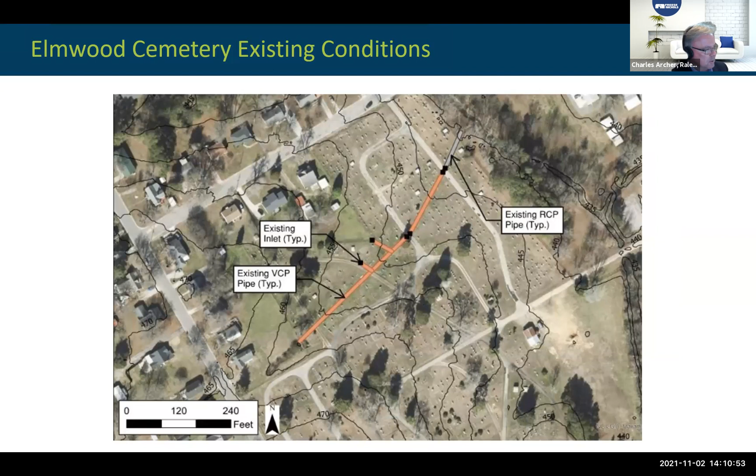And for all of these alternatives, as we go through, we looked at slip lining as well as trenched repair. Just a brief overview, and I've got a little video later on that'll describe slip lining a bit better. But basically, slip lining is pulling one pipe through the existing pipe to reline it, and ultimately using that slip line pipe in place of the existing.

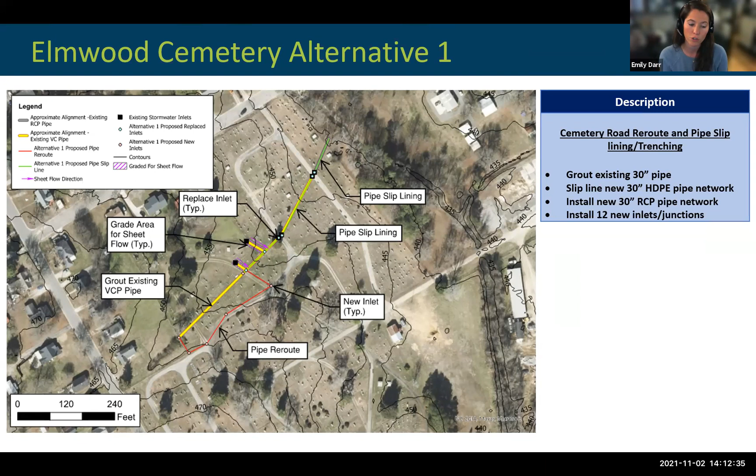And then trench repair is kind of your traditional dig up, remove, and replace type of repair. So each alternative looked at these, and we'll have the numbers towards the end for the different risk associated with slip lining versus trench repair for each alternative. So Charles, if you want to go to the next slide.

So alternative 2 is repairing and replacing the existing alignment. So as the pipe currently falls within the cemetery, this would involve the slip lining or trench repair of the full extent of the pipe.

We would replace the 7 inlets that are currently out there. For those of you who've been out to the cemetery, you know the inlets located kind of in the center of the alignment. The road's kind of beat up and starting to fall apart a little bit there, so while we're in there doing work, go ahead and replace those inlets.

The next alternative we looked at was a complete reroute of flow outside of the cemetery. This alternative addresses the situation of having flow through the cemetery, although you now have to deal with a lot more utility coordination along your right of way.

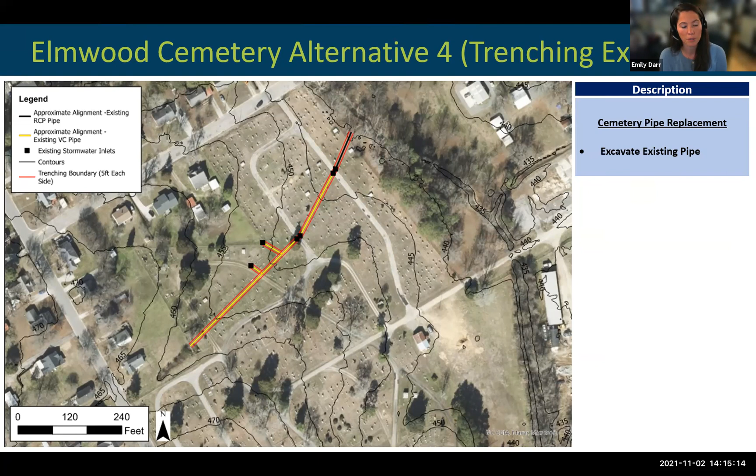As Charles mentioned, the existing pipe was only placed within a 6-foot walkway, so to speak. So very small equipment would need to be used, if any equipment at all, to access this alignment without disturbing the graves. That brings us to how we analyzed the different alternatives.

First and foremost, we considered the risk to the graves. We know this is a very sensitive subject, especially for people who have family members within the cemetery. We also considered the cost. Given those two factors, we looked at the different grave sites and the proximity to the replacement.

We quantified the number of graves within 5 feet on either side and within 10 feet on either side of the proposed alignment. Those are quantified in the second and third columns of this table, and at the end of the table you can see the cost estimates for each.

From a quick comparison, alternative 2 was the cheapest and the least risky, so the fact that those line up is a good thing. Moving forward with the project, we would recommend alternative 2, which, as a reminder, was the replacement of the existing alignment with a slip line alternative.

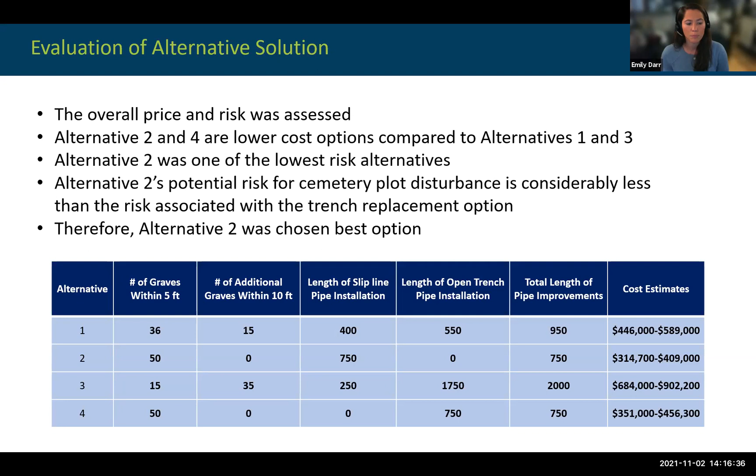So I think on the next slide we show a little video of what that slip lining is. Charles, if you want to play that, it's a short video.

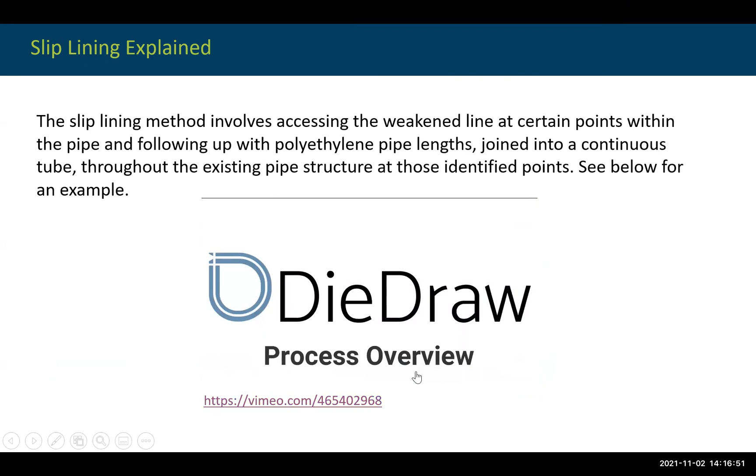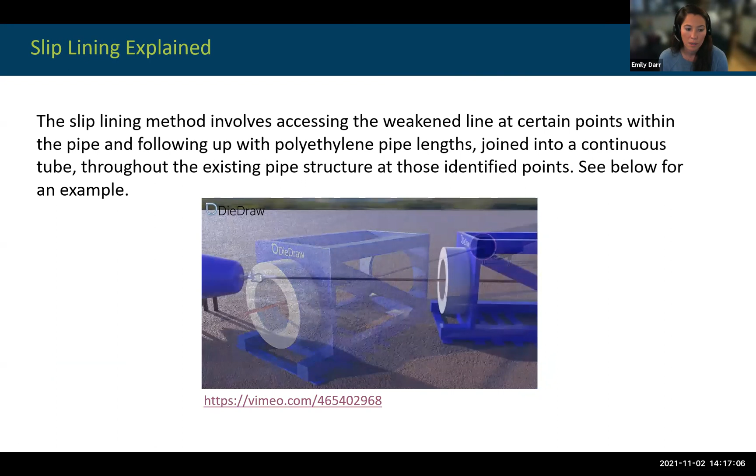The contractor will basically set up this system. He'll pull this HDPE pipe through the existing pipe. What it's going through right now sets the diameter of the pipe to be just smaller than the existing pipe so that it fits through the existing system.

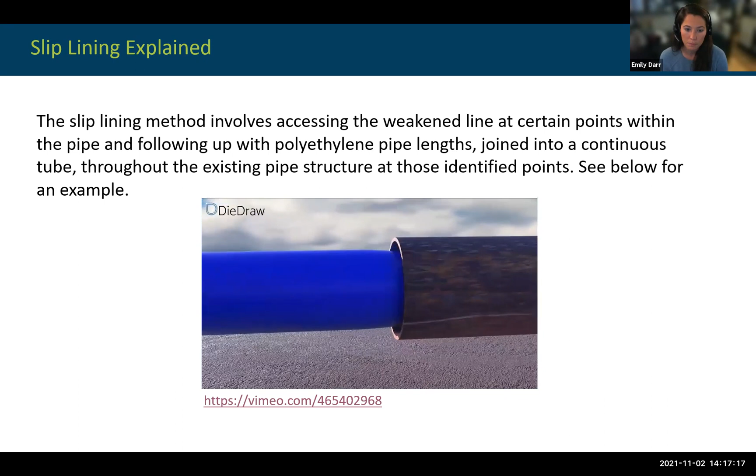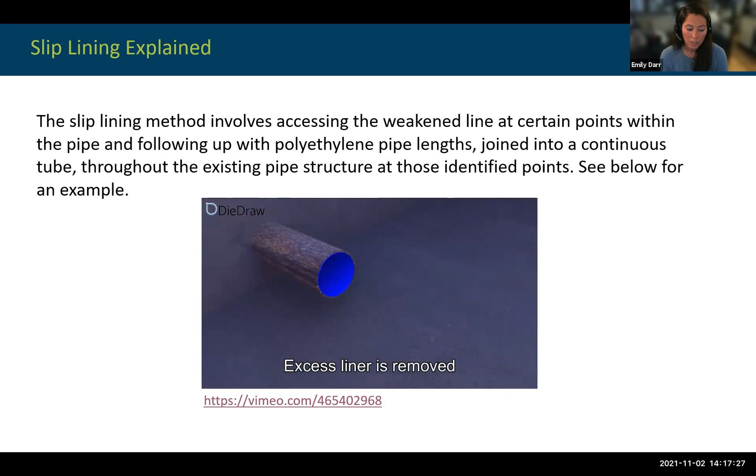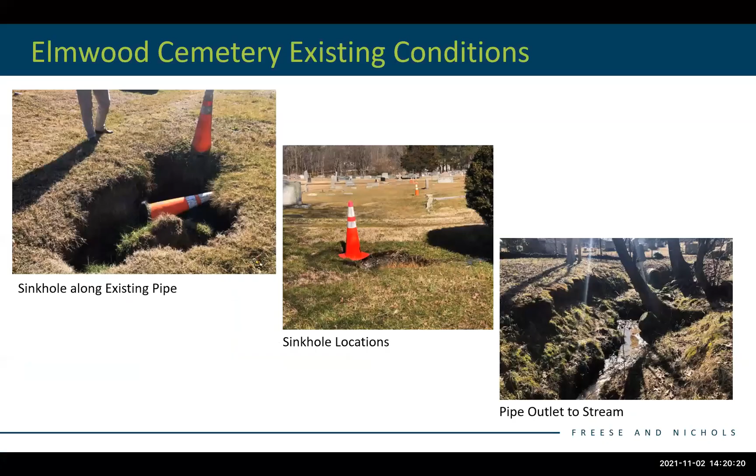Ellie, can you please explain for us, and it may be that I'm the only one that missed this, your description of inserting the slip lining and running it through, how that works with existing pipe, even if it's damaged, but what if the pipe is completely collapsed, so it has to be removed? What happens in those sections?

From my understanding, the slip lining contractor will set up a base, kind of an insertion point, and then he'll have another staging area downstream, and he'll pull that pipe through. He has said that even if it's collapsed completely, he's still able to pull the pipe and basically just move those pieces out of the way. So it would reform, from either end of the pipe that it's going through. It may just not go through broken clay pipe in those instances. Does that make sense? So it'll use either end of the pipe that's in place to kind of fill the void of the pipe that's failed.

Right, and they'll just kind of set up. What the video showed is that the pipe goes through and then it expands and it's contained by the existing pipe. So I'm just wondering, how does it retain the same diameter if it doesn't have any type of wall circumscribing the perimeter? What makes it stay the same diameter as the pipe that no longer exists?

Right, well it will only expand so much, so you won't have like a big balloon in an area where you're missing pipe. Now it may be slightly larger. So I think the existing pipe is 30 inches, so it might be slightly larger in diameter than 30 inches, but you're not going to see a full pipe size difference between those areas. It'll expand a little bit more outside of where it's contained, but it won't be so much that it causes issues.

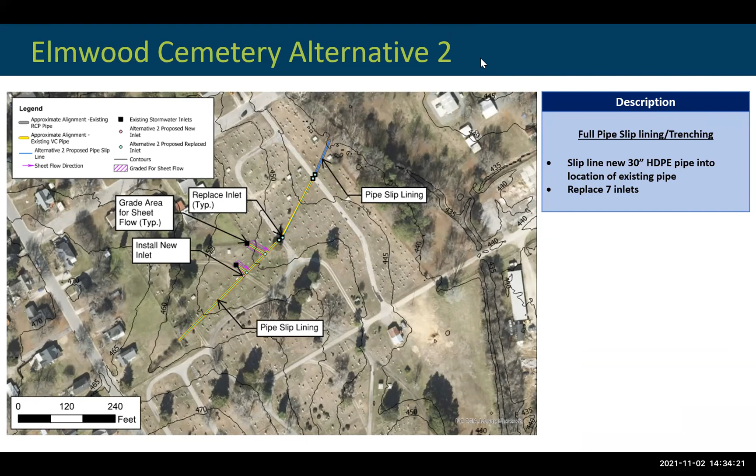So do we proceed on this recommendation to the full board, alternative two? I think at this point, the recommendation would be to move forward with the design. Whether we want to do construction at this point, but we could complete the design of the project. And then at the completion of the design, they can look at the market again with construction and see what kind.

Something strange going on up there. Oh, I do, don't I? Halloween.

So we could look at, after design, what would the construction be, and see whether this is something we want to try to do a budget amendment for this year or add it to the budget. And I don't have construction next year.

So the design right now is estimated at 13,000. Well, the design's gonna obviously include some of the other components. You have to do the survey in order to do the design, and you're gonna have to do your subsurface location. Most of this would need to be from your 13,000 on your chart down to the 8,000 environmental permit cost. The mobilization would be during construction, obviously, and material cost of construction.

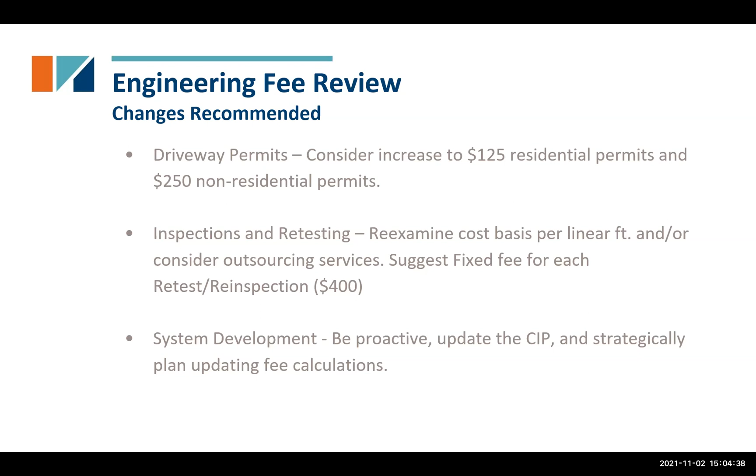So in similar fashion, we looked at the planning and zoning fees. These are some very broad categories. If you go to the table we prepared with the benchmark communities, they all have very different development ordinances and structures, with different terminology and different ways to establish many of these, and of course Board of Adjustment and sign fees.

You see these down at the bottom. Pretty standard stock and trade, but when it comes to permits, the way they differentiate between residential and non-residential, particular areas, zoning requests, conditional zoning, historic district zoning — every community is very different. We did the best we could to find similarities in those fees with yours, inclusive of the adjacent counties.

Permits, residential and non-residential, are all in the same range. Most of this is tradesmen-based, built on the cost for electrical work and plumbing work. You have basic charges for permits where you're trying to recover your cost and make it possible for additions, renovations, and similar work to move forward. We found those fees were pretty comparable across the board, because there are a lot of professionals in the building inspection business, with national standards and state peer-reviewed comparisons that keep those pretty comparable.

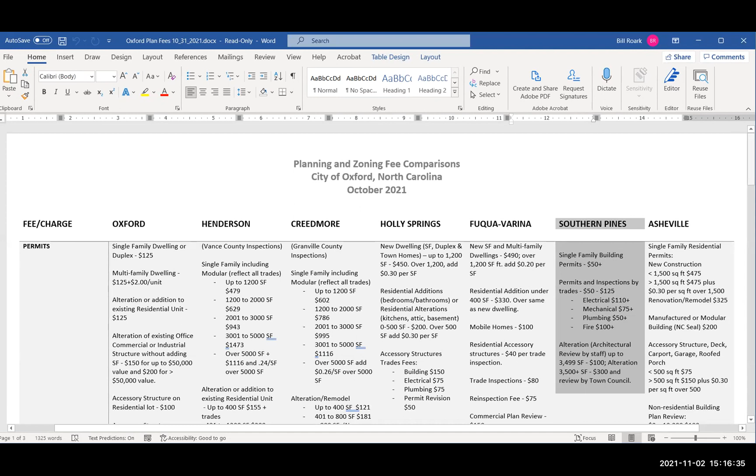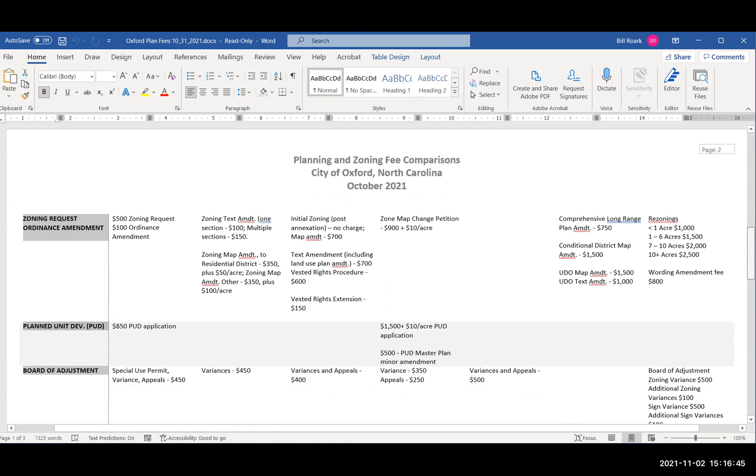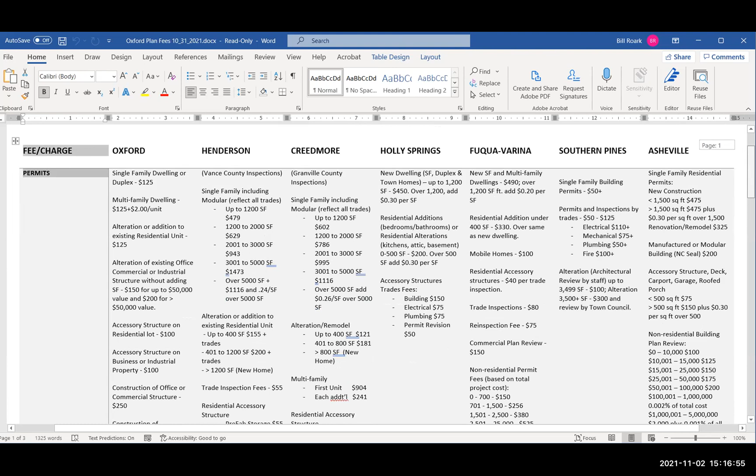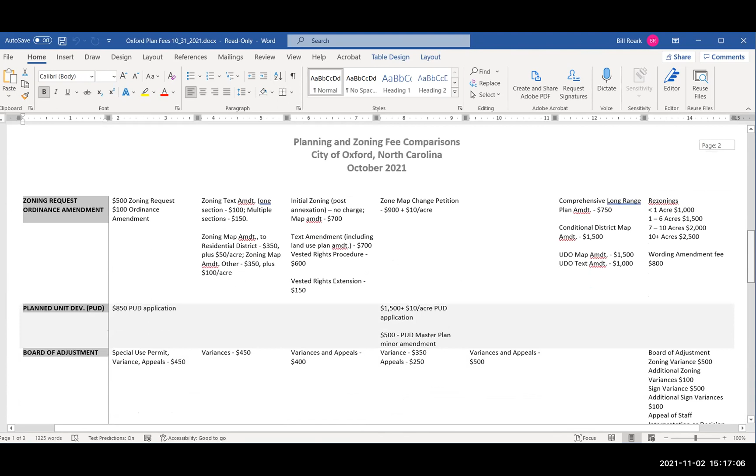So it's all those benchmark communities along with Oxford. We did this for the planning and zoning, and then we did also for the engineering. So we tried to distill all this down into that PowerPoint presentation to not overwhelm you with stacks and stacks of numbers. So these are all the fee comparisons? Yes. Okay, we were gonna give you the PowerPoint where we kind of distilled it down, but just wanted you to know that we didn't just pull those numbers out of thin air.

They did an extensive check and background on recommendations. I think everybody gathers the fact that what we're trying to do is not have the city's fund balance grow through these fees. What we're trying to do is hold our citizens harmless, essentially, in not having them pay the cost of developers coming in and needing all of the time with our staff, all of the resources, all of the attention. The fees that they pay should cover that. That is really the intent behind looking at this, to see if we are where we should be, or going where we need to go.

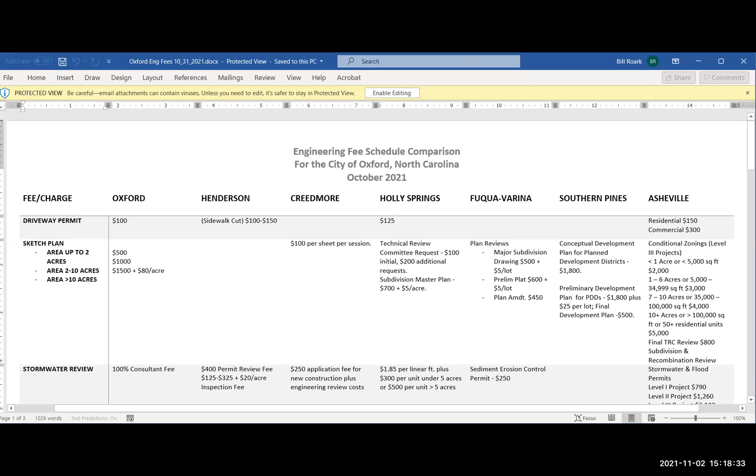And in some places we are not. And that's a byproduct of what they described previously, that we have had very little to slow growth for decades. Now it is on our doorstep. And all of this is growing pains, like we've been talking about for the last couple of years. And it's not new to the developers. It is new to us.

And you know darn good and well that there's a reason why the developers are here. They're here because there is an opportunity. An opportunity represents money for them. And we just want to make sure that it's not costing money to the city and the city's taxpaying residents. That's the real initiative behind this. It is not an effort to make money or have the city's coffers in any way, shape, or form.

We just make sure that our citizens don't pay the bill, and that in turn, when the developer submits these plans and their inspections and all these things that are required, that they're also being done in a timely fashion. That the developer expects, as well as a certain level of professionalism that is being performed during those inspections and reviews, so that not only does the developer get what they want because time is money for them, but the city gets what it wants and needs to make sure that the product produced is of the highest quality possible, meeting all the plans, specifications, and the engineering design that is there.

Because if you'd like to come up to my office, or if you'd like to go to Amy's office and pull out one of these plans, you'll see the level of detail in it. All of that has to be made sure to make it absolutely correct, because if you mess that up, you've got what has been prescribed before, as going back in and having to replace water lines. It's a nightmare. So you need to do everything you can to try to get it right on the front end. And with that front end comes cost, comes expectations, and it shouldn't come free. So that's just the bottom line in all of it.

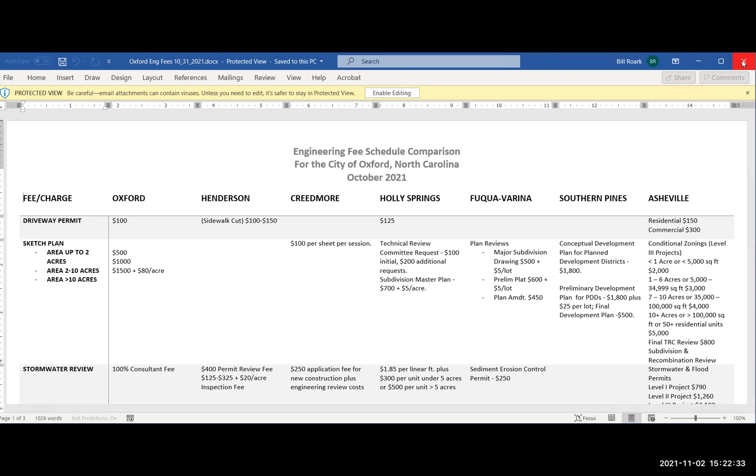You said we will be practical. Yes, yes. All right, what else do we need to talk about on this? I think right now we've discussed it enough. We really wanted to plant that seed in your minds and get your reaction, whatever that may be, to that conversation about fees, and to get you to hopefully understand where we are coming from and what we are doing when we propose something like this as far as a look back at our fees.

Nobody wants to pay more, but the developers are getting something out of this. The city hopes to in the long run, and the investment on the front end is critical, or you're going to pay dearly on the back end of it. We're starting to see some of that now, with some of the developments that came earlier and the condition of the roads and other things we're dealing with. Not saying anything was done inappropriately, but you want to do everything you can on that front end to make sure you're getting the highest quality product you can possibly get.

We may make a recommendation for the board at the December meeting for some of those fees that they indicated there were changes recommended. So we'll distill that down from everything they looked at, and those few items they did recommend changes for, we'd like to send into the December board.

For what it's worth, as retired city manager, I concur entirely. I would add to the comment I made earlier, this is a valuable process for you to review these fees and charges, because it's not just a financial thing, it's a regulatory thing, it's a quality-of-community thing. Whether you raise a single fee or not, having gone through this, be knowledgeable of where your fees are in the marketplace for your position.

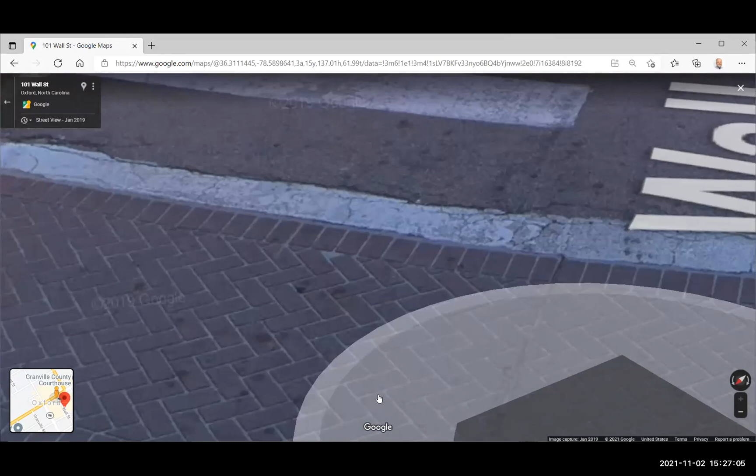We want to give crosswalks something other than the typical solid white stripes, which is the high visibility standard. Going ahead and providing something a little more aesthetically pleasing - by Wall Street you can see it looks like brick, it's colored, it's something different than your ordinary crosswalk. At the roundabout, there's a white stripe on either side, and in the middle we have the crosswalk look of brick.

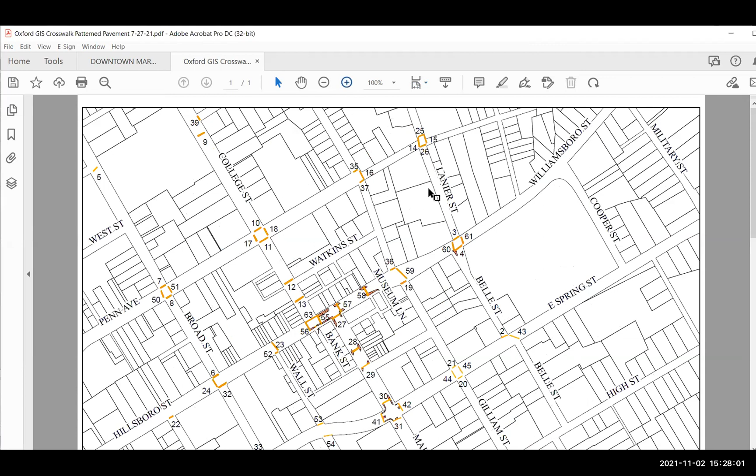So we identified the locations in the downtown area, reached out to the company that did this work previously, and put together a map that said, okay, if we want to achieve this look in the majority of the downtown area, these are the locations we can move forward with. You may have noticed DOT is out putting in handicap ramps downtown and moving forward with some of these things. I expect you can read this, but we can also make this map available showing all the locations where we'd put crosswalks and how they exist currently.

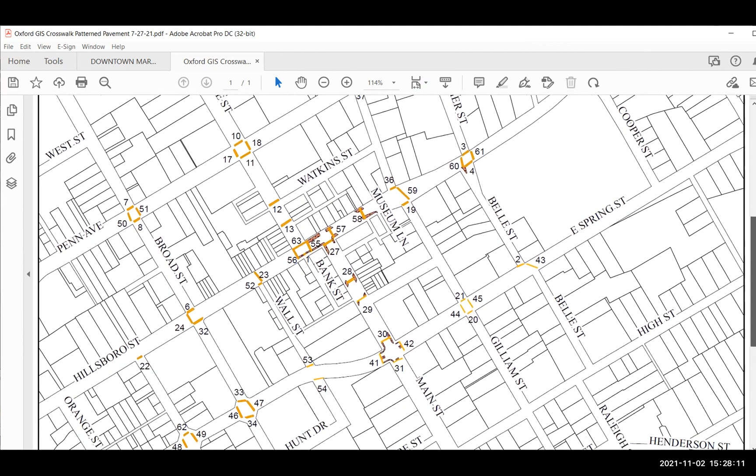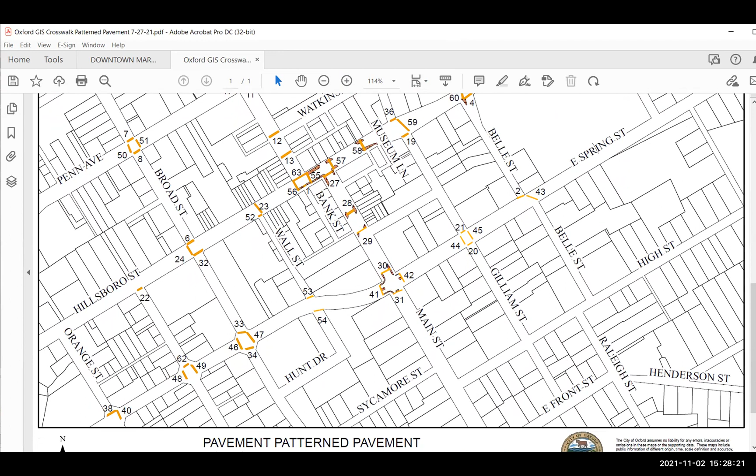We looked at the pricing of those particular locations and found that if we wanted to do all the crosswalks shown here, in the municipal service area, it would cost us somewhere in the neighborhood of $250,000.

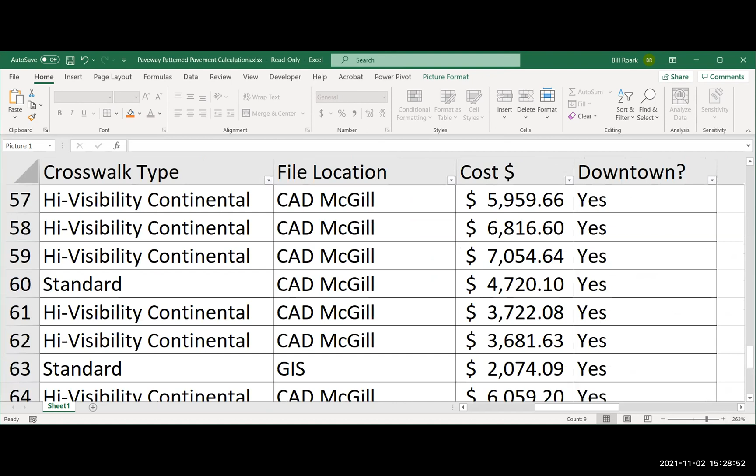We have a spreadsheet with estimated numbers that says our average cost is about $4,100 per crosswalk. So if we want to achieve a more aesthetically pleasing downtown look, this is the cost we need to keep in mind - $250,000 to do all of the crosswalks at about $4,100 per crosswalk in the municipal service area, as shown on that map.

If we identify more locations where we want additional crosswalks - maybe we only put them on 2 sides because that's where they exist currently - if you want them on all 4 sides, it would probably average $4,100 more. Obviously, the wider the road section of the crosswalk, the higher the cost, the more narrow, the lower the cost. So we looked at and made an estimated cost. As you do more crosswalks, it's like the Costco buying effect - it gets cheaper the more you do.

We estimated that we would do at least a minimum of an 8,000 square foot area, and that's when the price point drops to about $10.50 per square foot. We have a spreadsheet - I'm sure I'll be able to read all of this - that shows Wall Street and Spring Street and Hillsboro Street, and the cost at that particular intersection.

We will need to determine how much money we want to spend to achieve this look. If we want this to be part of the resurfacing package, done at the same time as the resurfacing next spring or next summer, we need to hand this to DOT ahead of time. So we've got maybe 6 months to look at this - I would say it would be safer to say about 4.

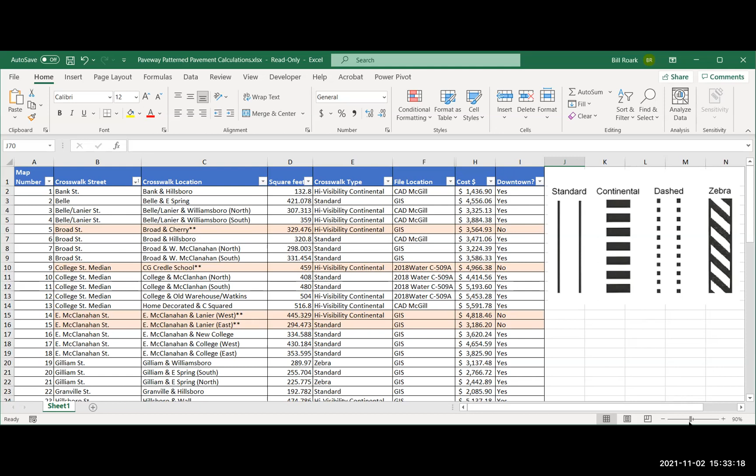And the same thing with item D on the agenda that we touched on briefly—keep in mind there's a significant amount of money potentially available in the spring round. If we want to go for that, some of the things we've done in the past, like readopting our asset management plan or making sure our CIP is up to date, because your project needs to be in the CIP if it's going to be something we're going to fund—any of those things we can do to get additional points so we can get that funding.

Because if we put the responsibility back on the developer to do something like was done for Oxford Park subdivision, where the outfall was extended to the subdivision, if they're borrowing from a bank, or we're borrowing from a bank with them to do a project like that, we're probably not going to get the same type of interest rates that we would with the funding. So is it something we want to do—those type of projects—and then add an assessment to anybody that ties to those lines until that line is paid for?

So we're putting it in ahead of time and then saying, okay Mr. Developer, if you want to connect to it, this line will carry a million gallons and you want 200,000, so you pay 20% of the cost of this line that went in. These are things we need to look at between now and probably March, because we want to be able to put the application package together. So I want y'all to keep these in mind—we do need some decisions moving forward, but not today.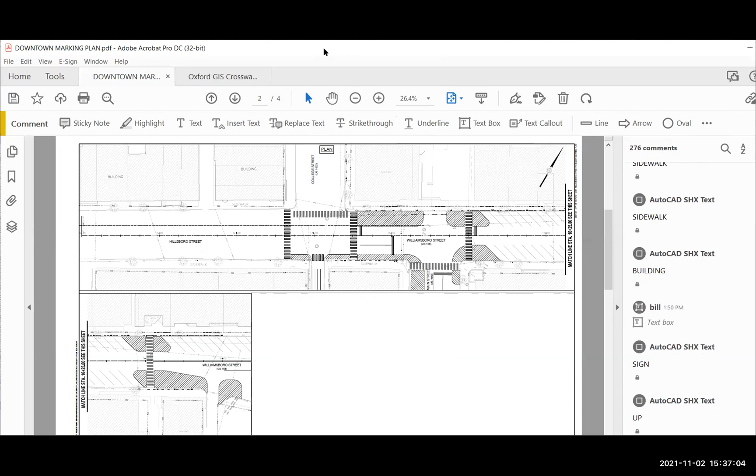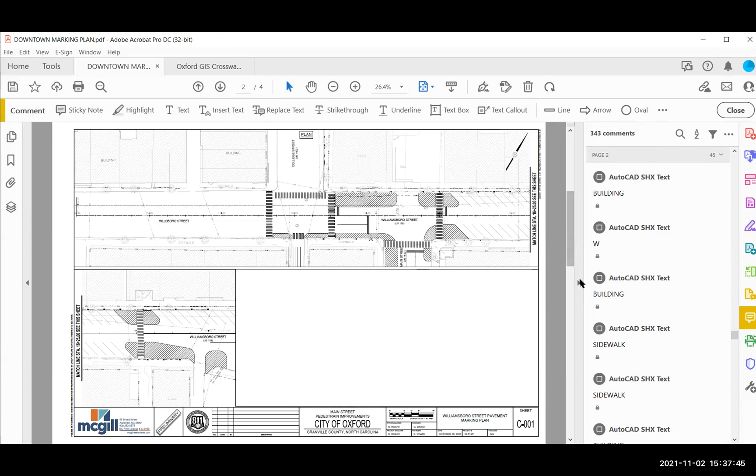Crosswalks on top of that. We've got to be very careful looking at it from the perspective of what our commitment is and for how long, because we're going to continue to have resurfacing needs on other streets even after this large project comes this summer. Some of y'all might be familiar with when we put this up before, some of those crosswalks when McGill was designing downtown on Main Street, the bulb-outs there. Some of these are the crosswalks we're referring to and what we want to do there. Alan made an excellent point that our resurfacing project coming up has taken a significant amount of money from the Powell bill funding. Is this something we want to devote money to that should come from another budget somewhere else? I don't know—Alan might have better ideas, maybe we can take it out of the general fund instead of the Powell bill fund, or is this something the downtown DEDC wants to try to fund to add a different look downtown?

One thing that wasn't on the agenda, switching gears for a moment, is our water tanks. This is a conversation Alan, Steve, and I have had a number of times, as we're looking at changing the company that currently oversees some of the work for the water tanks. The clause currently in our agreement with them requires that the recommendation be made by a voting member of the board if we want to change who we have a maintenance contract with. I think we need to take that responsibility back from the board level and keep it on a staff level, where the city manager and Steve really handle the tank contracts or maintenance. That's something they can look at and negotiate at their level rather than it needing to go to the board. But the board will have to recommend if we want to actually sever that contract with the existing vendor. Based on some exploration, it appears favorable to look at other companies. Potentially—Alan isn't quite there yet, so that's a continuing conversation among staff.

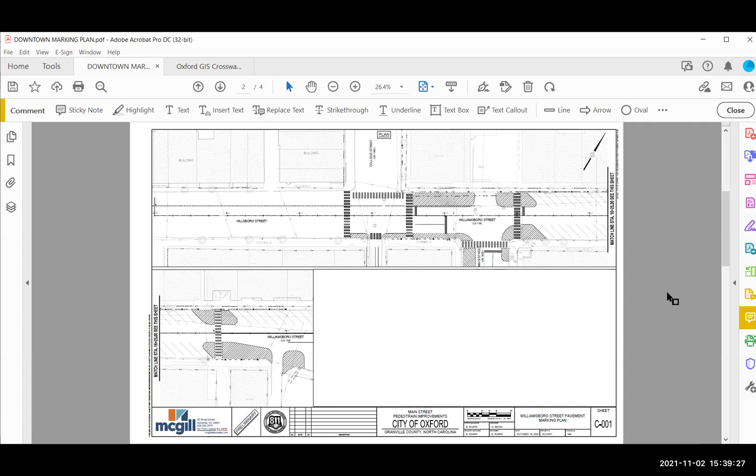Before we adjourn, for our elected officials present, take this with you. I've been having, as you know, some conversation with folks at the DOT Division 5 office about putting in a nice big brown historic 'Welcome to Oxford' sign. For a number of reasons I won't get into now, that's not quite possible at the moment—we may have to play the political game to get that accomplished. But what we are eligible to do is put in 'Welcome to' signs on 85 and potentially other entrances into the city of Oxford, which is DOT standard practice. There are some examples in there, so take a look—we'll have another conversation about it. It's food for thought right now, because I know it'll bring up a lot of additional questions and ideas about how they can look, what they can say, and all those kinds of things. I wanted to get it into your hands this afternoon because I've been having that conversation for the past month or so with the DOT Division 5 engineer. That's where we are at this point, and it'll be a topic for another day.

Okay, one other quick comment. I failed to mention that Cheryl Hart, our planning director, has joined us—for the record, have that noted. A lot of good work, a lot of good effort.